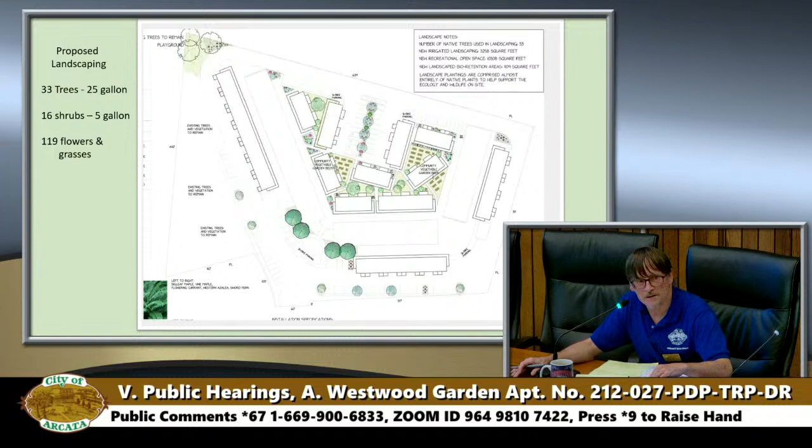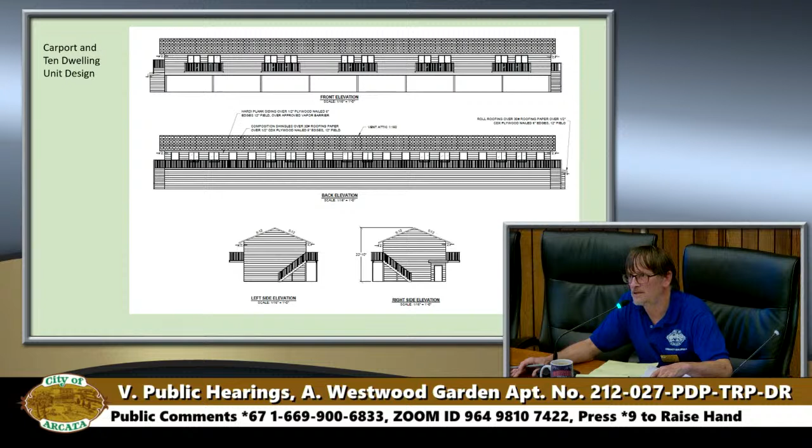This is to break up that tall mass there. The belly band would define the first floor and second floor. And then staff is suggesting that there be some vertical architectural features to break up that long horizontal siding on the lower floor of the carport.

There'll be a similar condition of approval for this, which is kind of their standard look for this, an 8-unit. Again, they're between 5, 8, 10, and 12 unit multifamily structures, and this is a version of the 8-unit one.

In this particular one, the windows are symmetrical, there's the balcony there and the entrances, so there's not that long continuous concern of unbroken mass, but we do get a little bit of that on the gable ends, and that's where we're requesting they have a belly band as well.

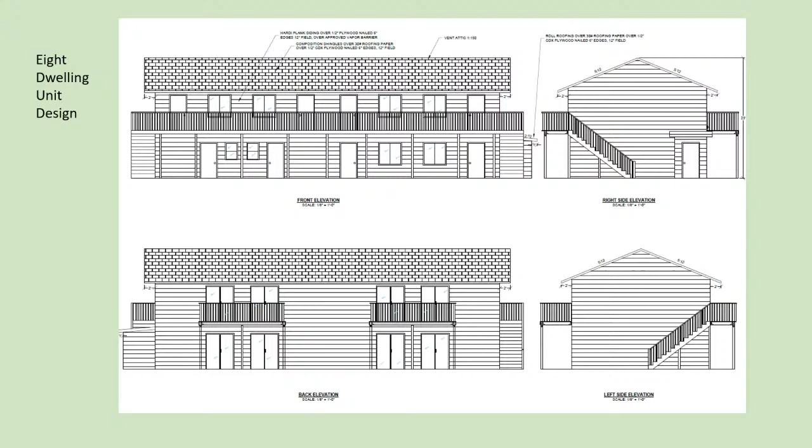The findings do go into more detail on the design element, and if there's any further questions we'd be able to address that.

The environmental findings, there are 5 different conditions that a project must meet. The findings do include a discussion on all of those and how those are supported.

Part of it is established by a court case. Even though the property is over 5 acres, one of the conditions is that the project site is not greater than 5 acres. In this case, the project site is clearly less than 5 acres, so the project does qualify for this exemption.

The site that's being developed is only associated with the 4.5 acre portion of the site, not the 0.7 riparian area. The findings that you'll find on Attachment A, Exhibit 1, do include the plan development permit, tree removal permit, and design review permit as well.

Some of those are overlapping, and I apologize for any redundancy in that staff report. The conditions of approval I mentioned already include the architectural features breaking up that long continuous siding, and the Janes Creek Enhancement Plan.

There's certainly resource conservation policies within our general plan that ask for enhancement of our degraded resources, and this is clearly a case that would do that.

There was a question about stormwater management, shown on sheet 1.0. They do have permeable pavement areas, and areas for rain gardens and other low impact designs spread throughout the project area. Every project in the City of Arcata and Humboldt County requires compliance with MS4 requirements, which govern the treatment of stormwater. Depending on the project type, there are certain requirements, and this project is required to meet that.

I'm going to let the engineer address that, since he's more well-versed in it.

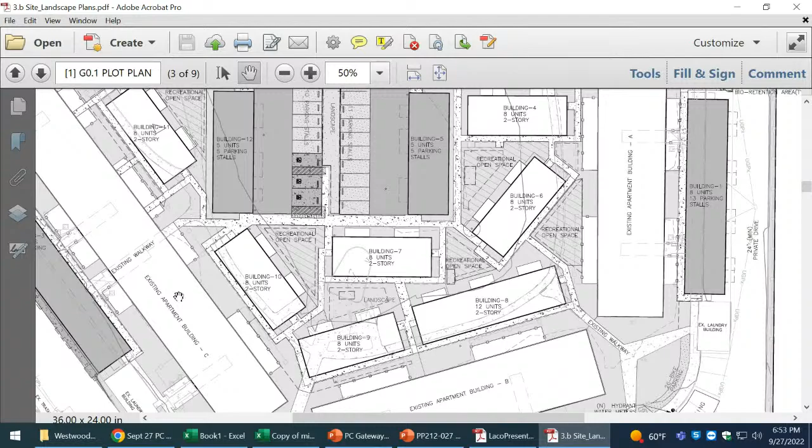Good evening, commissioners and members of the public. We have received the building permit application with the plans shown, so they have to comply with MS4 requirements, and they have submitted the plans. It's under review. We will not approve the building permit unless we know for sure the project meets the MS4 requirement. The culvert we mentioned replacing is the damaged, collapsing storm drain pipe at the property, and we are aware of that. That is part of the project, and they will be improving it.

Can you also address the pervious pavers maintenance, since you have the mic? It is on the private property. I have not seen in detail if they have proposed pervious pavement maintenance or not, but if they are proposing it, it will be maintained by the property owner, not by the city.

Are we going to have an agreement with them that they maintain it in perpetuity? Every treatment BMP is required to be maintained in perpetuity with regard to MS4 and PDS requirements. Currently we are not enforcing that, but we can definitely look into that during our review process for the building permit when we approve the project.

I'm also seeing the applicant's agent about to jump out of his chair, so I think they'll address that as well, but I do think we can address it as a condition on the MS4 permit. There was also a question about the plantings.

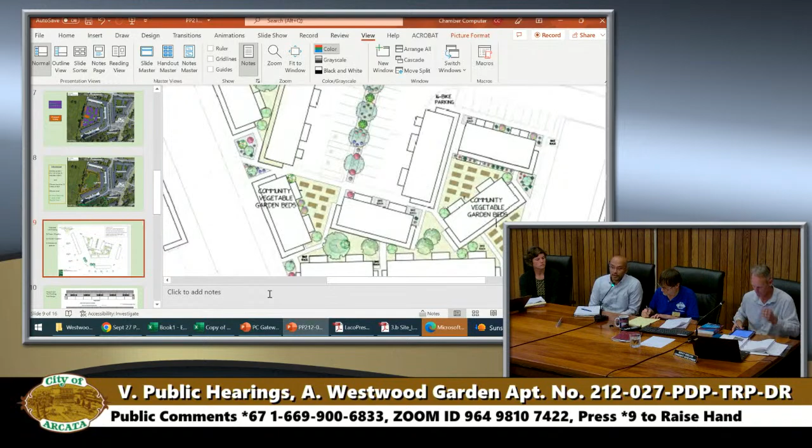So we did receive a draft traffic study for the project, and after reviewing that, we find it was not completely to our satisfaction, so we provided comments. So as a part of the condition of the project, we are asking the applicant to complete the traffic study to our satisfaction.

One of the main concerns was that they analyzed the existing conditions with the project, but it was not analyzed with existing conditions plus the future growth down the road in 10 or 15 years, and what would happen at the project intersection. So we have asked them to do that, and they are in the process of doing that.

I wanted to point out that the city engineer was using the term mitigation in the vernacular, not in the sense of CEQA. These would be conditions of approval for a CEQA exempt project.

In terms of scaling down the parking, I might ask a follow-up question. I think the intent was simply to reduce the amount of surface area that's covered. The parking is within the parking standard, and I'm going to ask Joe to confirm whether the new parking is to be decoupled from the units, so there's some incentive there for alternative transportation. But it is within the parking range. Can you speak to that?

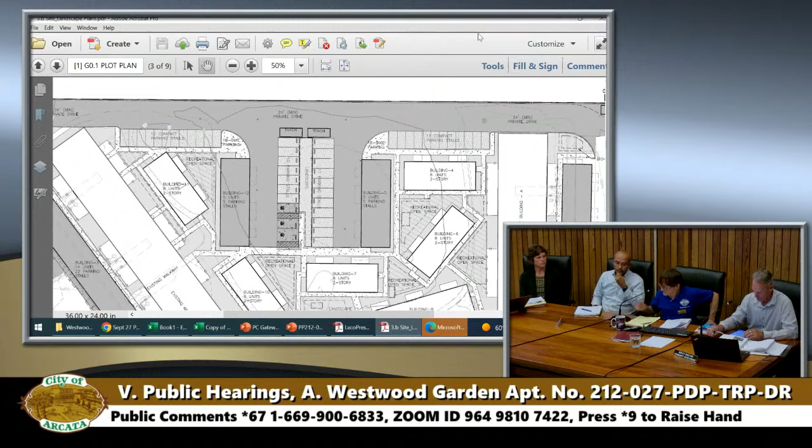In terms of the riparian enhancement, and whether it reopens permits with the water board, on the technical details I'll rely on our environmental services director, but yeah, it probably would require additional permitting to get in there and do the riparian enhancements. I think primarily what we're looking at is above high water plantings and invasive removal, that sort of thing.

Good evening, Commissioners. Emily Sinkhorn, Environmental Services Director. I think Director Loya spoke to just what I was going to say. There really may be water board permits needed at the scale of this enhancement plan that we were thinking of, really looking at native plant planting, invasive species removal at that scale, and not changes to the creek bed itself. But those would be permits and approvals that the applicant would need to work through.

Thinking about also just the public access easement that is being discussed, and we can speak to more. I can certainly see benefits to planning that trail with the enhancement plan itself. So I think those can go together.

May I ask a follow-up on that? Are you suggesting that the trail would go along the edge of that riparian zone there? Is that typical? Does that fit? Is there enough room there and it wouldn't be damaging to the watershed or the creek? I think the city would really hope to work with the applicant for the design of that trail, but as envisioned now, the key benefit and key goal is to be able to connect current and future residents at this location and members of the public to connect from Alliance Road towards the west and towards the parcel to the west that has been annexed and planned for future development.

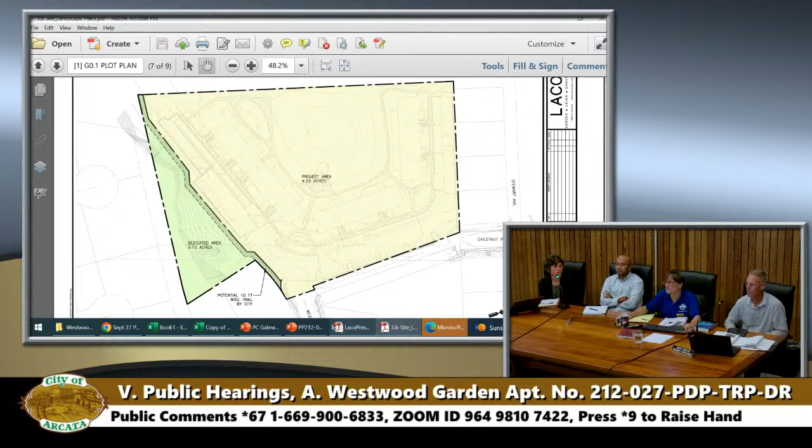So if this is a condition of approval yet it hasn't been designed, how do we know with confidence that something will for sure happen there? Yeah, I think both in the condition as it was written or discussed, an easement would need to be accepted by the city council. So that is one component. And we have also written it as a condition of final approval for the project, working with the city to find an adequate design and location for that trail.

So just really quickly, Emily, we're talking in respects to the dark line, it appears to be the 100-year base flood elevation. Are we proposing something that would be above that, so we're not looking at hydro modification? Yes, so that is our intent.

And so whether that is right up against or part of the existing paved area as it is now, I think that's where we really will need to be more in the design phase to ensure that it can be a feasible and maintainable trail into the future. Sounds good.

Were there any other questions? Let me consult. I think we had one more, and maybe we just addressed it. There was, where is the access to the trail? I think we satisfied that. I feel good about all that.

That was covered? And then in terms of the concern about the long continuous wall and the other buildings, I think the answer is yes, that the condition to break up the design a little bit would follow with that as well.

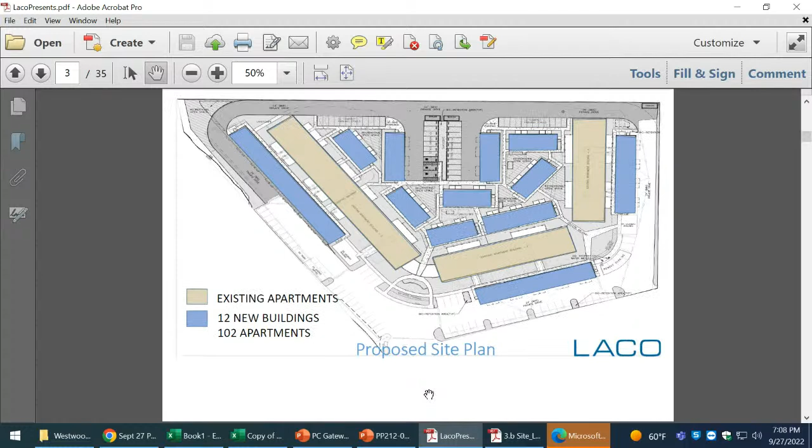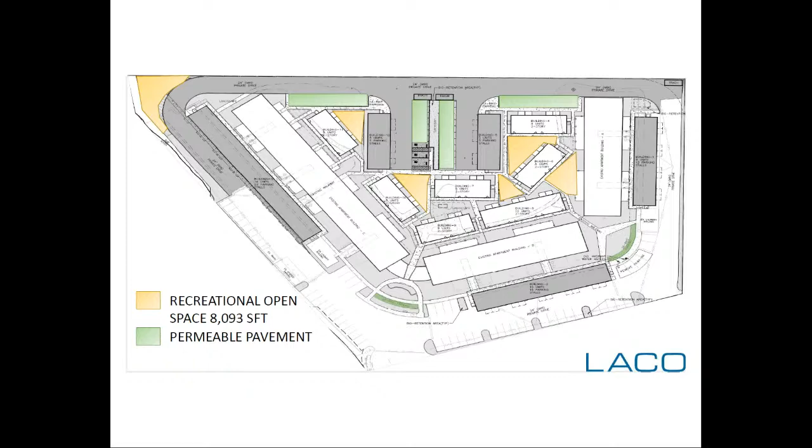The project shown in this off orange-yellow color is the recreational open space. There's just over 8,000 square feet of recreational open space proposed for the project. The green rectangles represent the permeable paving, which would be installed in the parking areas. I will speak to that just in a second regarding the maintenance of those facilities.

Next slide, please. The project site does include 5 separate bioretention areas and additional stormwater retention areas that are included within the open space landscape areas. These bioretention areas have been designed through a stormwater control plan that was submitted to the city. We do have calculations, and we are treating all of the new or replaced impervious surface with this project.

As it relates to the maintenance of these facilities, according to the low impact development guidelines, this is a regulated project which requires that stormwater BMPs be maintained by the property owner. There will be a maintenance agreement between the city and the property owner, with annual inspections and monitoring reports submitted to the city in compliance with your MS4 permit.

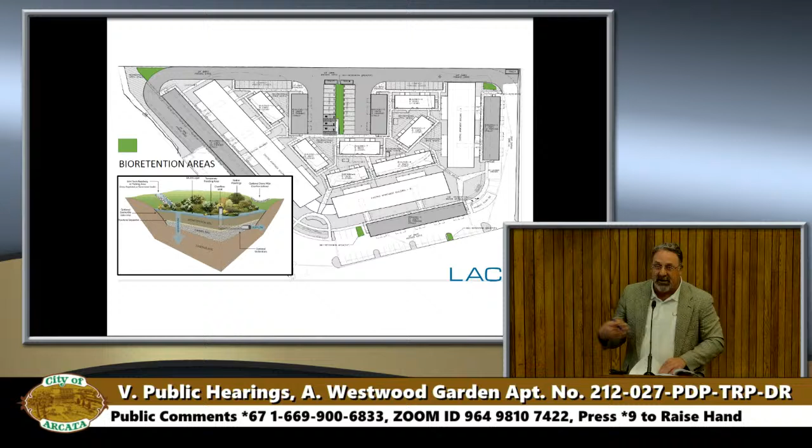Mechanisms for maintaining permeable pavement, just to answer the commissioner's question, generally involves sweeping or vacuuming those areas at least once a year. It's pretty common for open parking lot areas to also have the sweeping and vacuuming. So that's typically the best way, and you have to stay up on it regularly so that they do not clog, but they do function properly. Next slide, please.

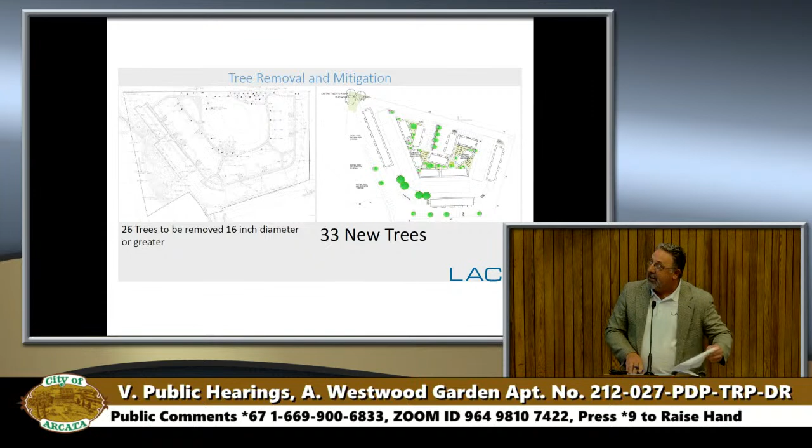This is the tree removal plan. We did not calculate the average size, but we did provide a table to the planning department showing the number of trees and their sizes to be removed. I apologize, I couldn't come up with an average size off the top of my head. I'd say probably somewhere between 20 and 22 inches if I had to pull an average out, but that's information we could happily provide to the planning department. There are 33 new trees that will be planted, and we'll talk about that in the landscaping.

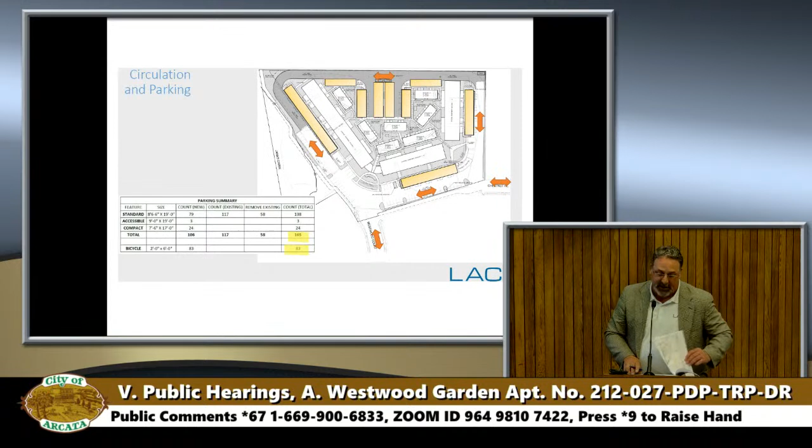This diagram shows the circulation of the project. It is a two-way, 24-foot wide street that loops through, providing connectivity to the two dead-end roads that currently serve the residential apartments. This circulation pattern was designed to gain access to the rear of the property. We've worked with the fire department on the width of the road, the locations of the hydrants, and the access points so that we have safe access for emergency responders on all sides of the buildings. As staff mentioned, there are 165 parking spaces, 106 of those are new, and 83 are new bike parking spaces.

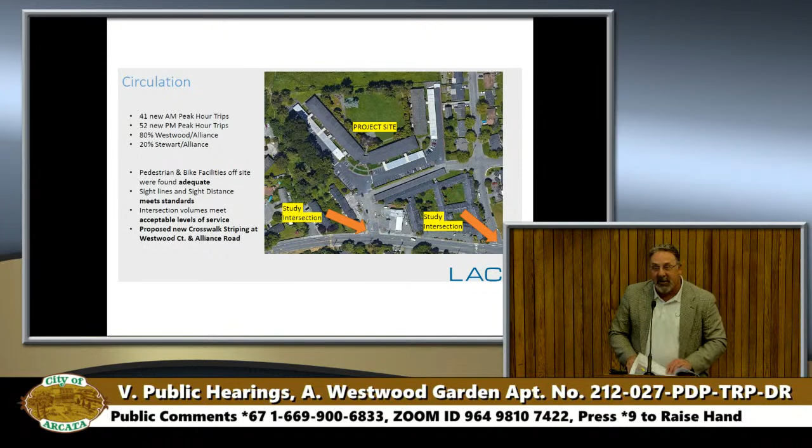We did have a traffic report prepared. They analyzed two intersections: Alliance and Westwood, and Stewart and Alliance. It was found that there would be an increase in trips per day, but the level was not significant, and the queuing of traffic and traffic volumes would still allow these intersections to operate adequately. We have received comments from the city engineer and asked our traffic engineer to respond, so we're currently working on that. We are in agreement with the condition of approval that's been presented.

For the site amenities, I wanted to mention that our clients met with the residents of the Westwood Apartments last Tuesday. They held a meeting and talked about the project with them. It was determined that some changes in amenities would be proposed. One of the outcomes of that meeting was the community gardens.

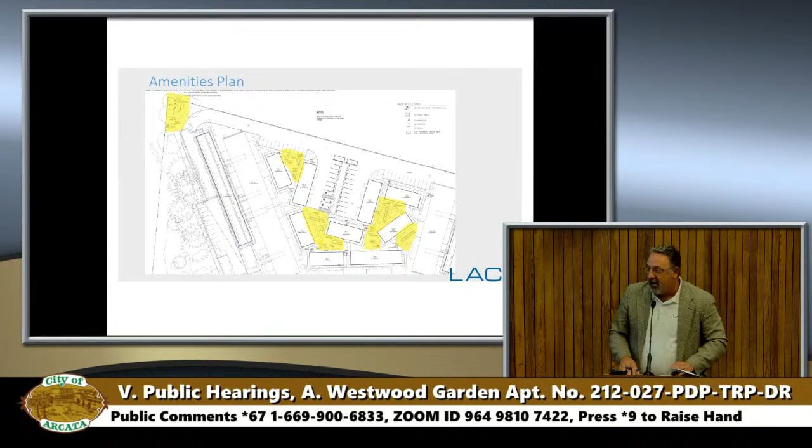For the amenities for the site, in these open areas there will be bike racks, picnic tables, barbecues, benches, and raised community garden beds.

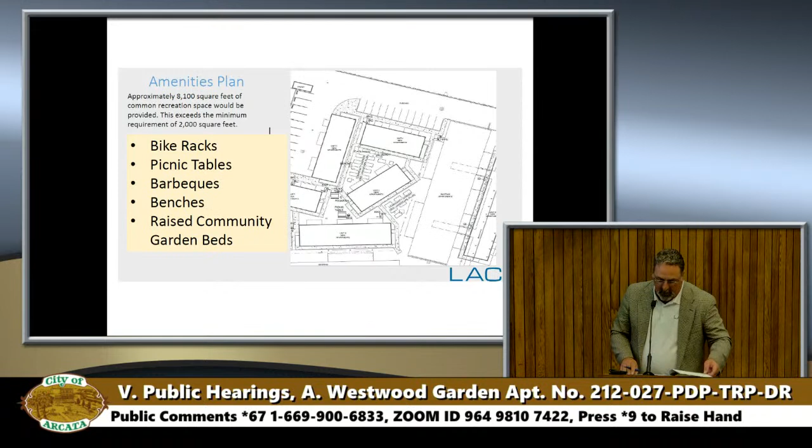This next slide should help answer the commissioner's questions about trail access and the dedication of an open space easement. Originally, our client preferred to donate the 0.7 acres of riparian land to the city so they could do what they needed with it. The city doesn't seem interested in accepting that land in fee, but with the approval of alternate condition B18A, the applicant would be required to submit and record an open space easement so that access to the trail and maintenance of that area could be provided. We think this is a fair compromise, so we're requesting that condition B18A be considered tonight.

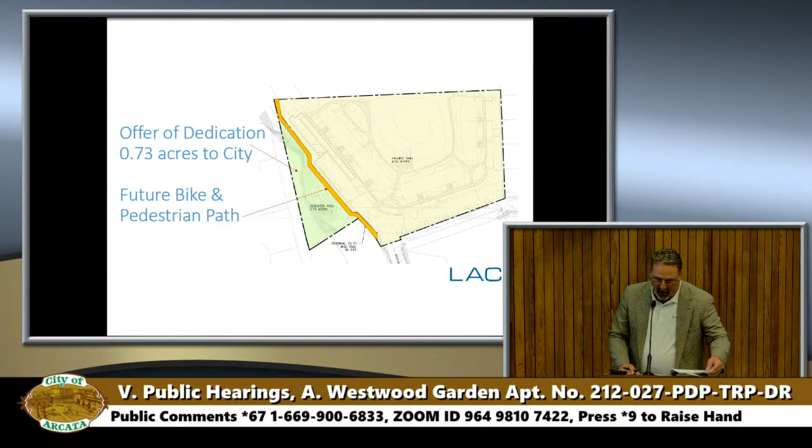The landscape plan, we had prepared to talk about it, but I think what we'll do is leave it for questions. Eric Strombeck is here tonight to answer those questions if you have any.

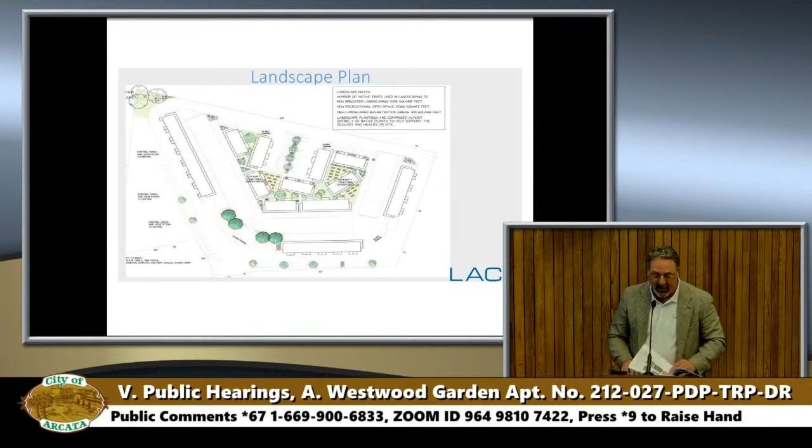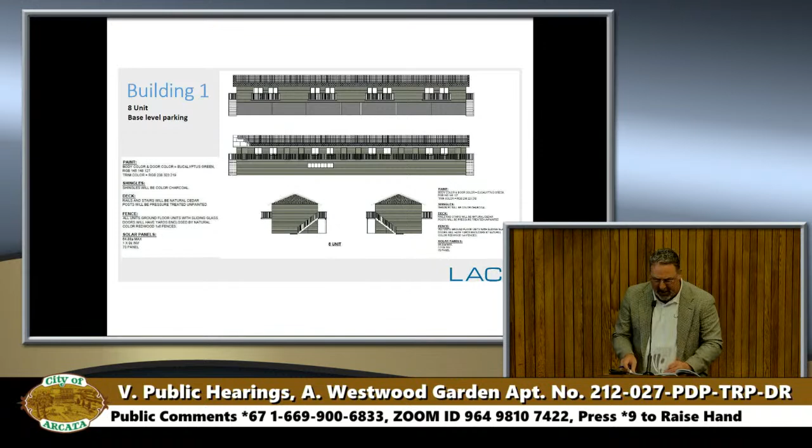I'm going to leave this one slide up here. This is probably one of the longer buildings, I think building 1, an 8-unit building. Would you mind going to the next slide? Is that the longest? Yeah, a 14-unit building. This is the longest building. We'll leave this slide up here in case the commission wants to talk about how the massing and the long horizontal wall might be broken up. I'd like to have our client speak to that as well, since they're going to be the ones building it.

Lastly, I wanted to invite Steve Strombeck up to the podium so he could speak to you. Steve and Eric will be constructing the project. They are the property owners, and they will also be the managers of the project as long as they maintain ownership. Steve?

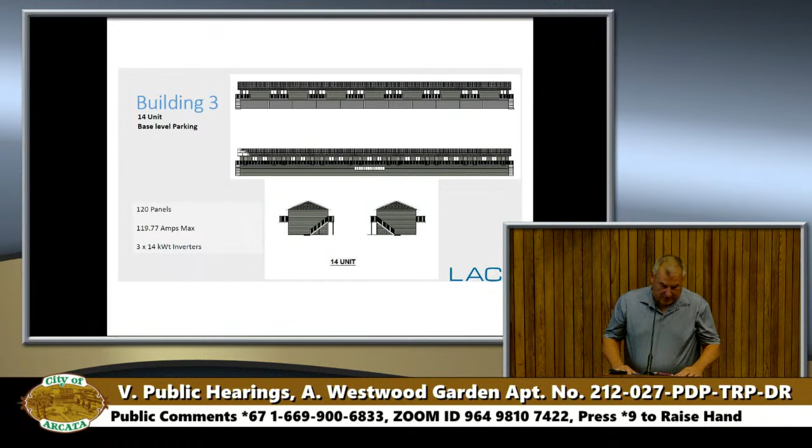I want to give a little history about what I've done in the city of Arcata for the past few years. In 1994, I purchased a property at 115 Samoa Boulevard that I call Meadowbrook Properties. At that time, Alice Harris was the city manager, and with her cooperation she said, Steve, we have over 500 police calls at this location, we really need some help. From that time on, since I bought it, in that one year we got it down to, I believe, under 10 or 12 police calls. So I worked with her, and we ended up building 52 new units there on that site as well with her help.

Since then, I've added 185 new units in the city of Arcata, and I've remodeled over 400 units in the city. I currently have over 100 units that are either low or very low income in the city of Arcata, so we're probably one of the few private individuals that actually does that type of work. Over the past 28 years in Arcata, I've worked hard to provide quality housing for a wide range of income levels. And I have a letter from the Department of Health and Human Services from the county.

I wanted to read this letter because I think it tells you about how we operate, since we do end up renting to some of these folks. It says: we at the Department of Health and Human Services Mobile Engagement Program want to say thank you. You have been an important partner and contributed to the success of so many of our clients. Our clients, who often struggle with mental health disabilities, poor or no rental histories, and long-term homelessness, frequently experience stigma and discrimination. They can linger on the streets for years without the opportunity to even be considered when applying for housing. Over the past 5 years, even in such a competitive rental market, Strombeck Properties has given so many of these vulnerable people a chance and the opportunity to rent their own place at one of your properties. So I want to let you know, we love working with other agencies. We work with the Arcata Housing project, and I think we do a great job of not only managing but maintaining our properties as well.

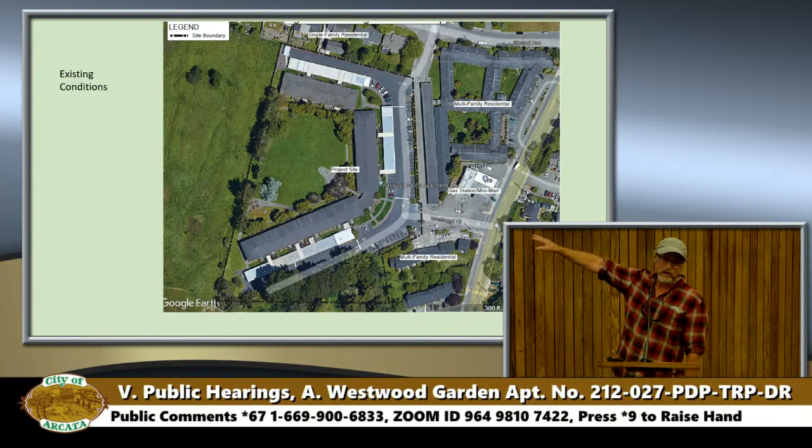All those kids, they're going to be students. Let's call it what it is. This is student housing. We need it. All of those kids that live there, they're not driving their car. They're going to be walking right up that footpath, which is fine, but let's take care of the footpath. Let's address the issues there.

I think gates that are opened in the morning and closed at night are required. I'd like to see, if this project goes forward, I'd like to see that as a condition of approval. Thank you.

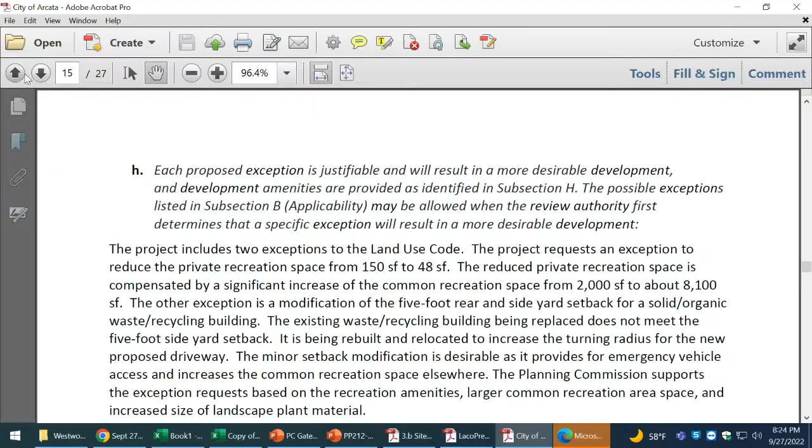Why should we find that reasonable, or why shouldn't we? I think it is definitely okay. It's compatible with adjacent uses, and if you look around that area, there are a number of similar apartment buildings. Does similar mean compatible, when you're filling up the space that makes those apartment buildings so livable?

Well, the question is, what does compatible mean in this case? I believe that filling up all of the remaining open space in that area does not represent compatibility. Some people might say that it does. And of course, since we don't know what the adjacent property to the west will be, we can make no judgments about compatibility overall. We have to assume that that is what it is now. We know that it actually won't be. And so, although it's difficult to say this building isn't compatible with that specific building, we don't know what the overall compatibility with surrounding uses is likely to be. I'm recommending to myself that I can't make that finding.

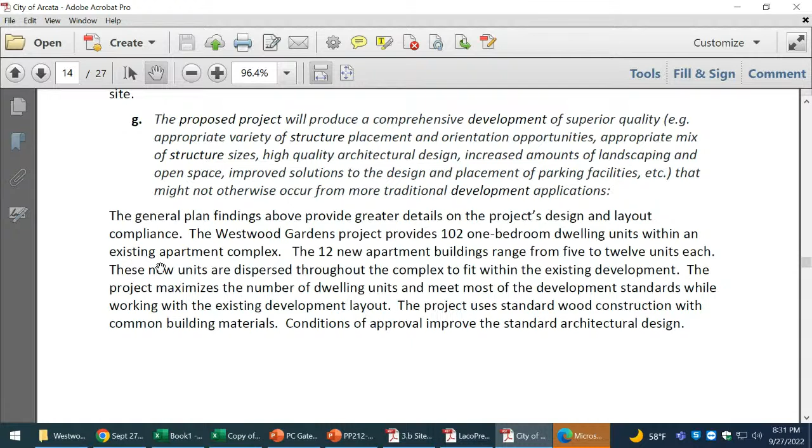The proposed project will produce a comprehensive development of superior quality. I'm not sure I need to read any further. Well, yeah, proposed project will produce a comprehensive development of superior quality. So what the heck is superior quality? If there's superior quality, there's inferior quality somewhere.

I think this whole paragraph here is unclear, and it makes it difficult to make a real decision. It goes on: superior quality, for example, appropriate variety of structure placement and orientation opportunities, appropriate mix of structure sizes, high quality architectural design, increased amounts of landscaping and open space, improved solutions to the design and placement of parking facilities, etc.

High quality architectural design. Now, there's a can of worms. High quality architectural design. I've already said that this doesn't strike me as being real high quality architectural design, but it's also adequate and suitable for the use. We don't always get high quality architectural design, you know, it's hard to even define exactly what that is.

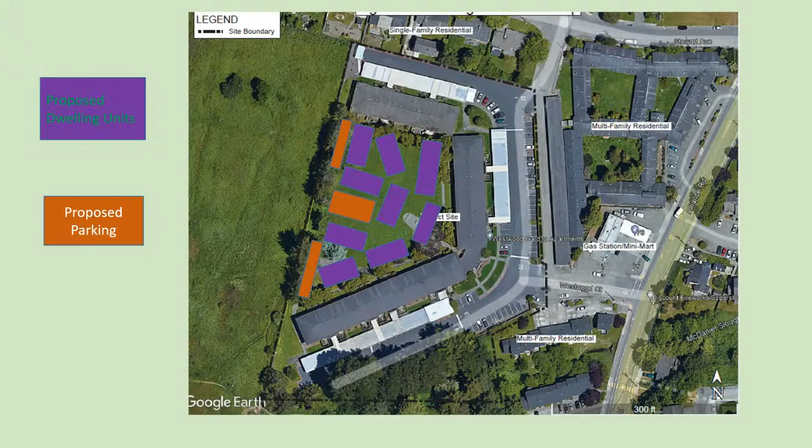Another question that came up that the project proponent may want to weigh in on is whether the development could be done while retaining some of the mature trees on the site. That might be something that addresses some of the concerns raised. Let's hear if there are any other ideas or questions from commissioners about the tree removal findings, and then maybe we can get some feedback from the project owners.

Sure, of course. So John used the word planned unit development. I apparently am confused, because I live at a planned unit development, and my thought was that you owned it. That's not the case, they can be rentals? We refer to the permit type as a planned development. Planned unit development in real estate has a specific meaning around using them to create condos, which I believe is unit development and condominiums. They're two separate things, but I think some jurisdictions would call our planned development a planned unit development.

So, David, are you roughly suggesting some kind of back and forth with the applicant at this point? I mean, or between the commissioners, you have points, counterpoints. There's a couple of different options at this point. There are certainly some concerns elevated that we haven't gone into in depth, and I'm not prepared to at this point, around our latitude with respect to some of the housing laws that have been adopted in the last couple of years. We're still conducting research on that.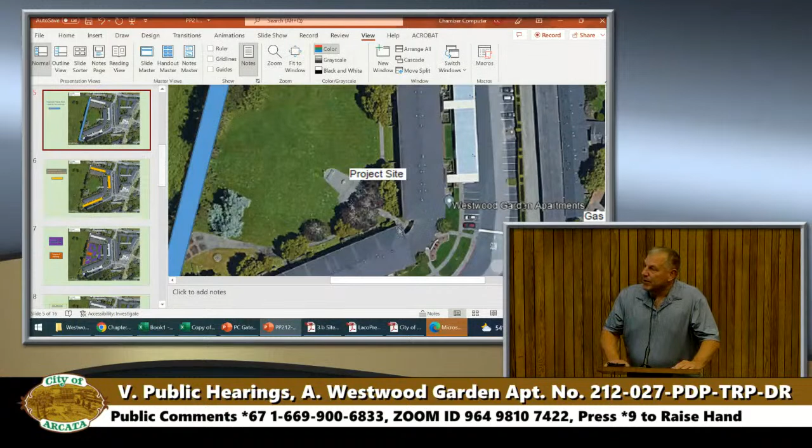If you'd pull up the one slide, Joe—maybe on the first or second slide, there's a 5-unit. If you guys are talking about maybe more open space, I'd be willing to get rid of the 5-unit building. It's the smallest building, and I'd be willing to take that out right now. I believe it's that one, right? Yeah, I think it's right. One little bit down, Joe, right there. It's the one he had. Okay, thank you. So that's the one I'm willing to take out at this point in time, because that's what I'm hearing—you guys want more open space.

I think the fire department kind of wants this whole circular thing from a fire standpoint, because there are a number of buildings in the middle—they won't be able to get in there with their fire truck. If you took out that building, could the road then swing in a little bit and avoid taking out the line of trees? Yeah, we would. You could reconfigure things around a little bit.

Absolutely, and you also hear us request open space—that would be the other key ingredient I think everybody's pushing for. I was just telling my son, if we can move buildings, even whatever, we'll work with the city, but if we can even move it to save a tree, obviously we'll do that. I agree, I don't want to take out a bunch of trees. We are going to plant a lot of 25-gallon trees, but if we don't have to take out trees, we won't.

What's a realistic timeline to rework this and have something you can bring back before the Planning Commission? Well, the problem is, to be honest with you, I've got 15 guys that are working full-time, and we've been working on this since last February. We've submitted applications and been working on this, and we were hoping to come to you two weeks ago, and that got kind of fouled up.

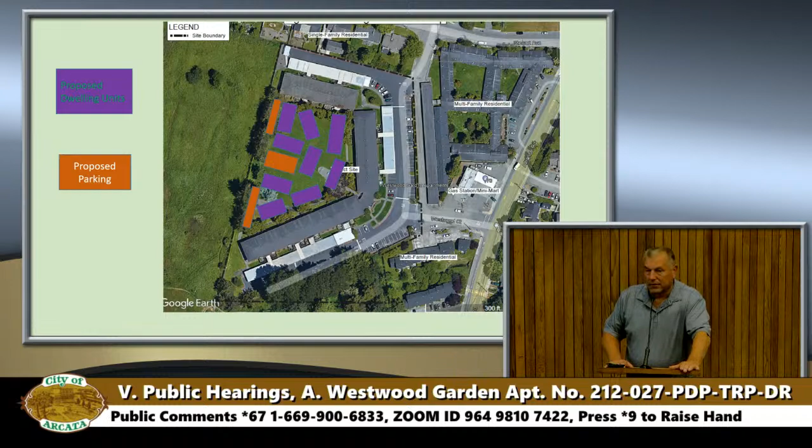So we came up with that design. And it would be so expensive and time consuming now to change it. It just wouldn't be worth it for me to change it now. We'd have to basically start all over to go to the outside, and it's just not something I really desire. Thank you. Thank you.

Might I ask a question, a point of process? We don't get to hear from the community anymore—is that how that works? That's up to the chair, but typically the public hearing you open it once, and then you close it, and then you have your deliberations and take actions.

I feel like we've heard enough community input. I feel very clear on how the community and residents feel. I'm trying to find a way to incorporate the owner's willingness to make some changes and find out if there's a motion that could be put forward that includes that language so we can reach some kind of agreement on this project this evening.

My hunch is that we're not there as a group, that you wouldn't get the votes, short of seeing a redesign. Like, let's just see it.

Yeah, and procedurally, if you did have another motion, you'd have to resolve the first—I guess you could resolve the second motion first, I have to check my procedures on that. If you're asking for a second motion, I'll have to get back to you on what we do there. The only other motion I think you could entertain would be to condition the project with the applicant's agreement to remove that. You'd be doing it a little bit blind, trusting that staff could implement the vision the Planning Commission set out. So it's really up to you whether you want them to come back, or whether you trust that with those changes they'd be able to modify the project to your satisfaction.